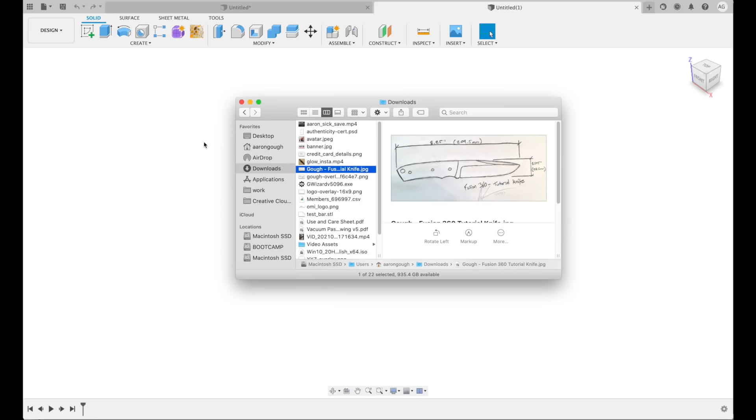Underneath the video, there's a link to this drawing. So just download this, have a quick look at it, and make note of the length and the height. So now in Fusion 360, with a blank drawing, the very first thing we're going to do is to create a new component. So if you come up here and go create new component, and then we're just going to call that blade. Within our blade component, the first thing we're going to do is insert the drawing that we're going to use as our guide and make sure that's the right size.

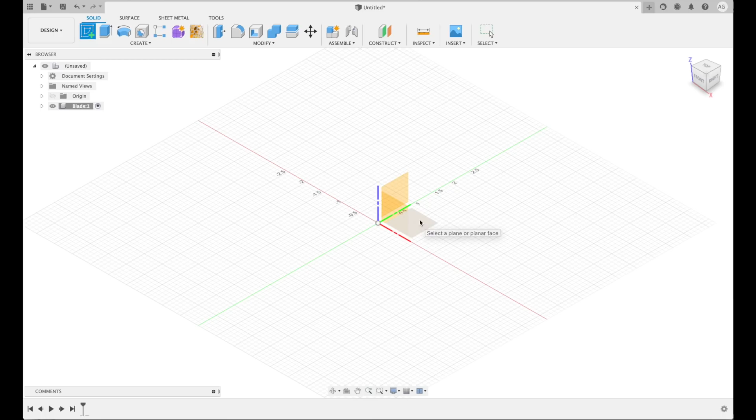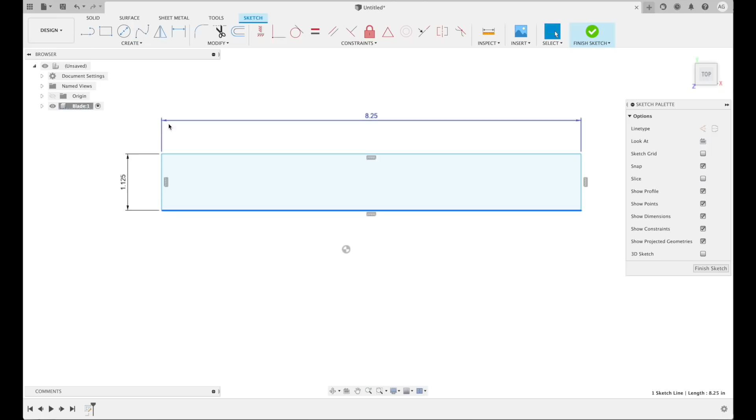First, we're going to go create, sketch, and we're going to create a sketch on the XY origin plane, which is this one that's lying down flat. And then we're going to draw a rectangle that's going to serve as a guide for placing the drawing. So go create, rectangle, 2-point rectangle, and then click and drag. And if you don't click again and you hit tab, you'll notice that these dimension input boxes are changing. So I'm just going to put 8.25 inches for length and then 1.125 inches for the height. And we're going to use this as a guide for placing our canvas.

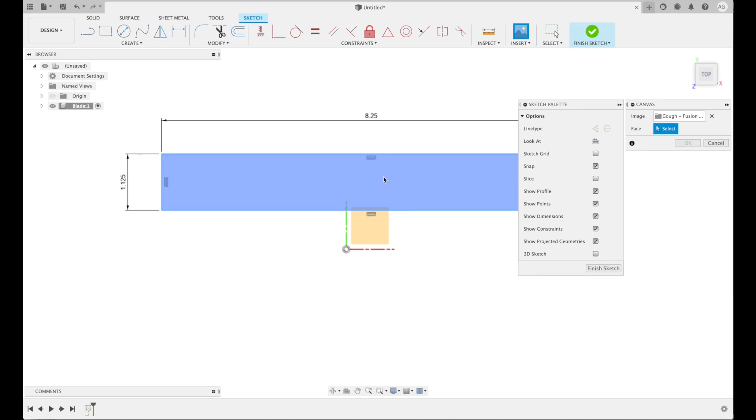So up here in insert, go insert canvas, and this will let us place the drawing of our knife. So click insert from my computer, go to your downloads folder and find the drawing and then click open. Now it's going to ask you on which face you would like to place this canvas. And we could choose the center of this rectangle, but we actually are just going to have this as a temporary guide. We're going to delete it in a little bit, so we don't want to place it on this face. Instead, we want to place it on the XY origin plane. Click there, and then you'll see this tiny little drawing.

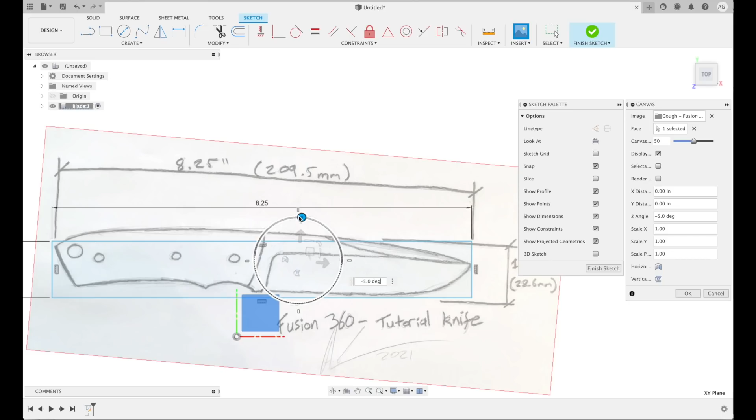So we need to resize this, and then we can drag the square handle around to put it in the right place. So the size is pretty much correct. You can see it's actually on a bit of an angle. So you can grab this top rotation handle and turn it. Now the problem is that it's in between those two snap points. So just come into this box and change the 5 to a 3. And then the knife is pretty much perfect. So once we've got the drawing of the knife correctly positioned and sized, we're just going to come over here to the canvas toolbox and click OK. We no longer need this rectangular guide, and it's actually going to get in our way. So just click and drag to select it all and then hit delete.

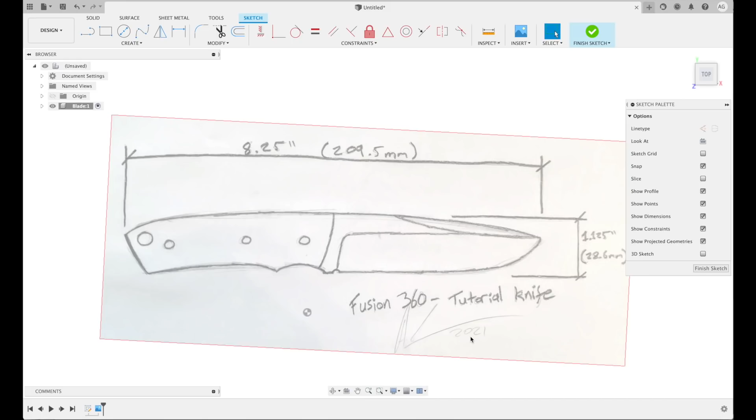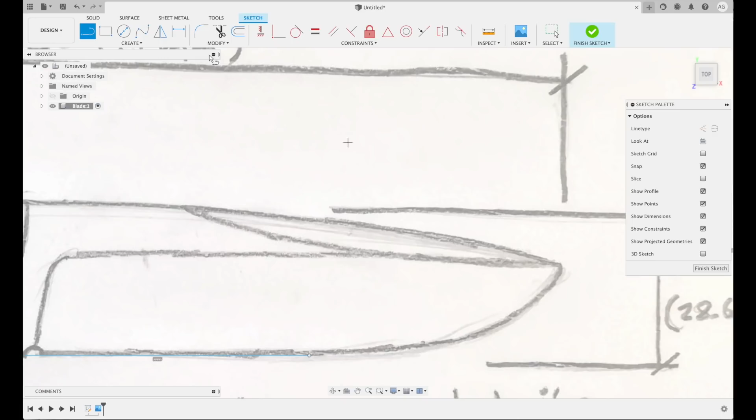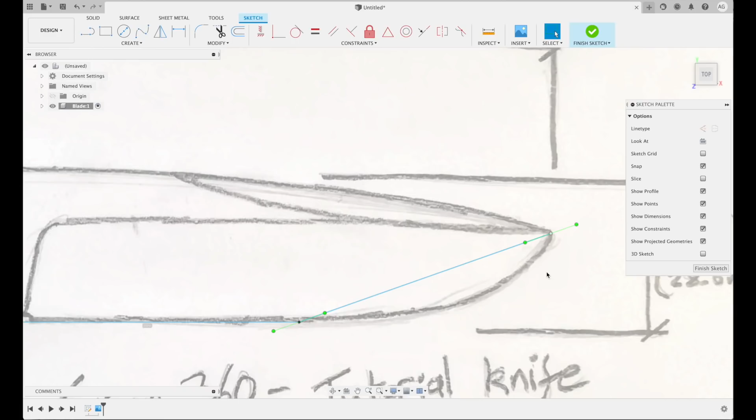Okay, so to get started, we're just going to put in a straight line along this section of the edge. So if you go create line and then create the longest straight line that we can here, about here looks correct. And then we're going to continue this line with a spline. So you go create spline, fit point spline, choose the end of our straight line, and then place the other end of the spline right up at the tip of the knife. We can't manipulate the handles of this while we're still in the spline tool, so you have to just hit escape to get back to your regular mouse cursor, and then start dragging these handles around to get the right shape for the blade.

So for the spine of the knife, it looks like we might actually be able to get away with a single spline. Create, spline, fit point spline, and we'll choose the tip of the knife, and then click all the way back here at the butt of the knife. And we'll manipulate the handles to try and get the exact shape that we want.

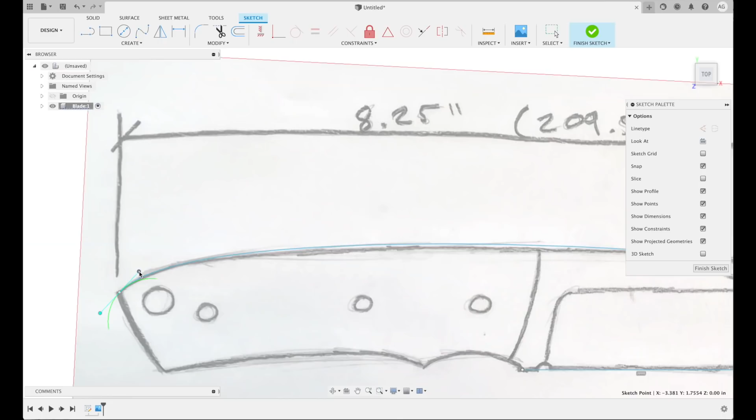There you go, perfect. Done this whole spine of the knife with a single spline. Some sections of the knife, like the butt here, don't necessarily need to be a spline because this looks like it's just a simple radius. So instead we can create an arc. So if you go create arc, 3-point arc, then you can create the two ends of your arc. So one at the butt of the knife and one at the bottom of the handle here. And then you can just create a simple radius by dragging. That looks about right. You can just click to place that arc.

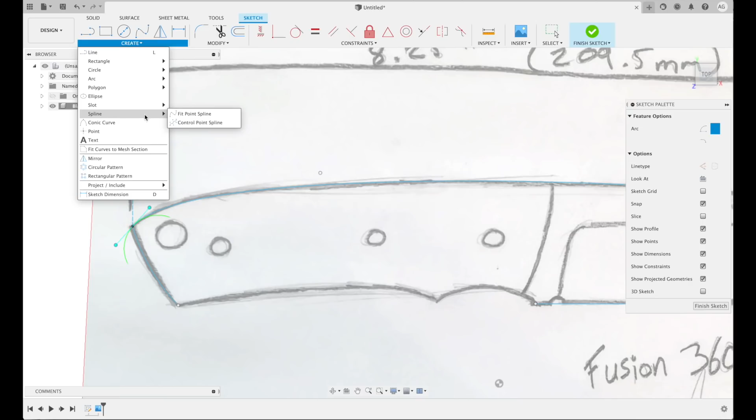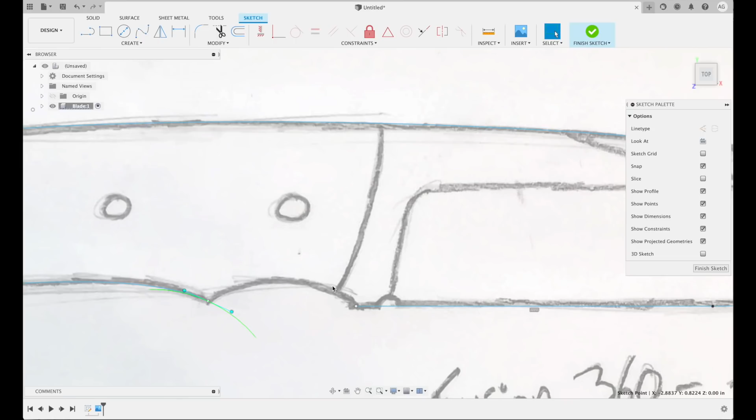Do another spline for the handle shapes. And then this looks like it could be another arc as well. So I'll go create arc, 3-point arc, put in the two ends here, and then make our arc.

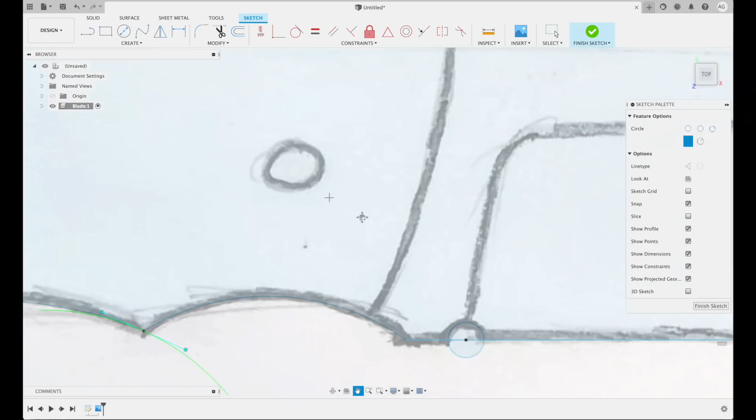So now that we've got the outline of the knife completed, we need to go through and add a couple of details. So let's do the coil first. So if you go create, circle, center diameter circle, then you're just going to choose the center point of the circle and then drag it out to be the size of the coil that you want. Then up here, we're going to create another circle for our pinhole, except this one's actually going to be dimensioned. So type 0.125 and then hit enter.

We want to create another circle here that's perfectly in line with the other one. So to do that, we're going to go create, circle, center diameter circle, and then hover over the center point of this circle, and it will actually allow you to snap to that center point. So again, type 0.125 inches and hit enter.

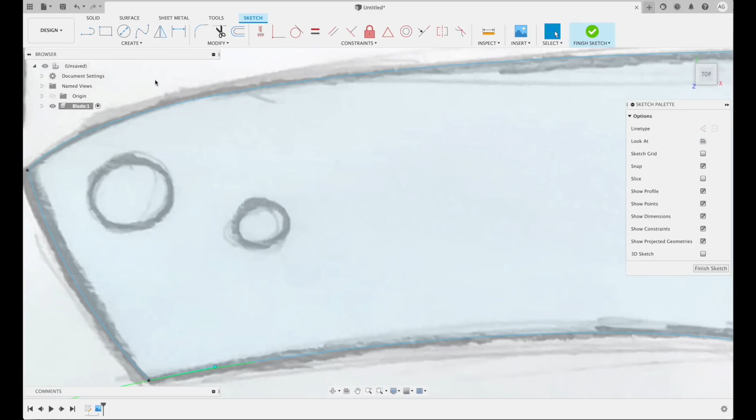This third one isn't in the same plane as the other two pins, so we're not going to snap to the other pins. Instead, we're just going to go create circle, center diameter circle, and put it in where we think it should be. 0.125, hit enter, and then we can fine tune that position a little bit. Same here, we go create circle, center diameter circle for our lanyard hole. And the lanyard hole is going to be 0.25 inches in diameter, quarter inch.

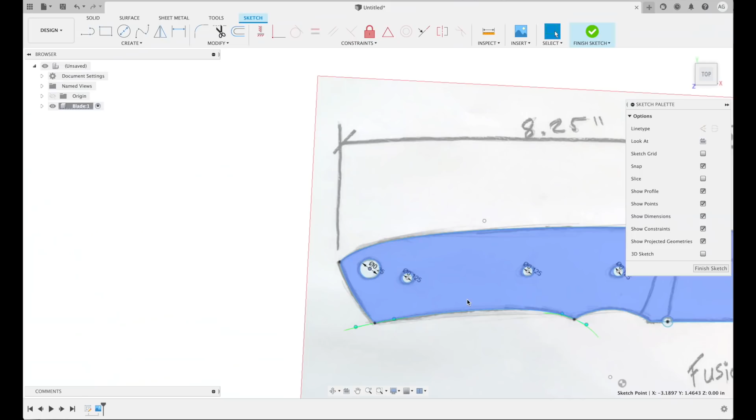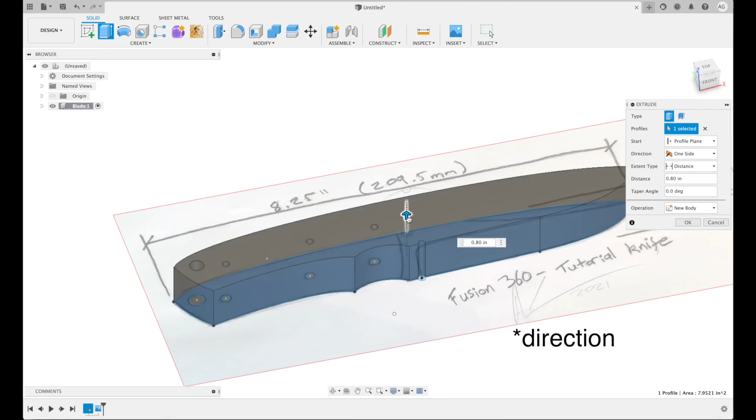So now we have all of the details of our knife put in place and ready to go. So we're just going to go over here, click finish sketch, and then now it's time to make this into a 3D knife. So to do that, we're going to come up here to create, we're going to go extrude, and we're going to choose the area around the blade and click on it, and then we could just extrude in one direction, but that means that the blade isn't going to be symmetrical around the XY origin plane. It's actually really convenient if it is, because then we can use that as our mirror plane if we want to replicate features from one side to the other.

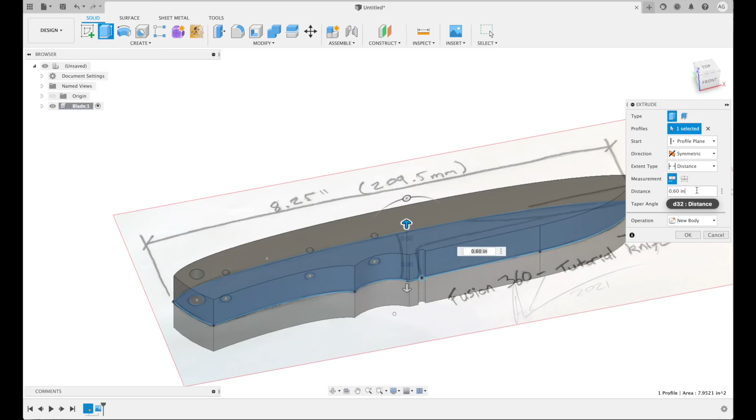So to make it symmetrical, we're just going to go over here into the extrude toolbox and change it from one side to symmetric. And then here for distance, we want the total thickness of the knife to be 0.156 inches. But because it's symmetric, it's going to make it 0.156 inches in each direction. Fusion actually allows you to do formulas in boxes like this. So we can say 0.156 divided by 2, and that will give us our correct overall dimension. Everything looks good, so we're just going to hit OK.

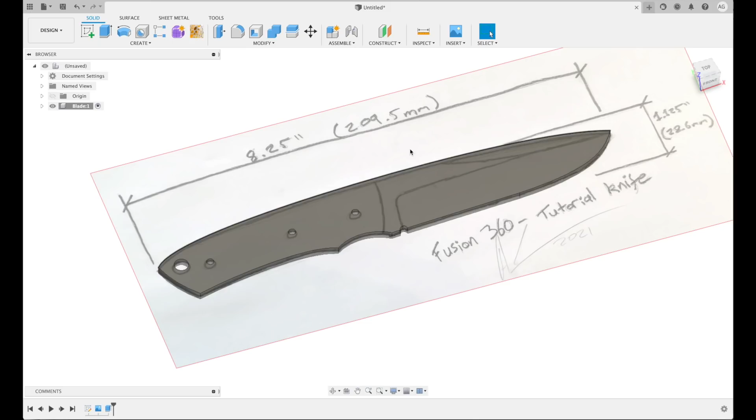Now let's get stuck into making the bevel. So the very first thing that we need to do is actually to create a plane. The plane will allow us to draw a sketch through the plunge line of the knife, and that's where we need to draw our bevel shape. So if we go up here to construct and then plane at angle, we're going to choose this line just at the front of the choil.

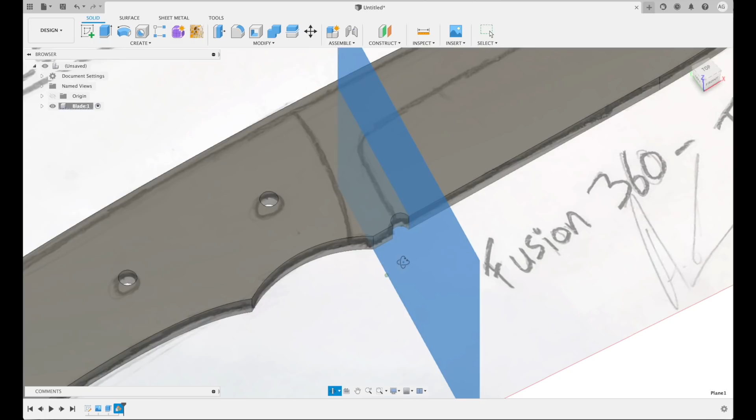And then you can see that now we have a plane that is at an angle relative to that line on the choil. So we're going to rotate this until it's lined up with the plunge line from our drawing. That looks like it's right at about 80 degrees. Then we're going to hit OK. Now on that plane, we're going to create a sketch. So go create sketch and then choose the plane as where we're going to draw the sketch.

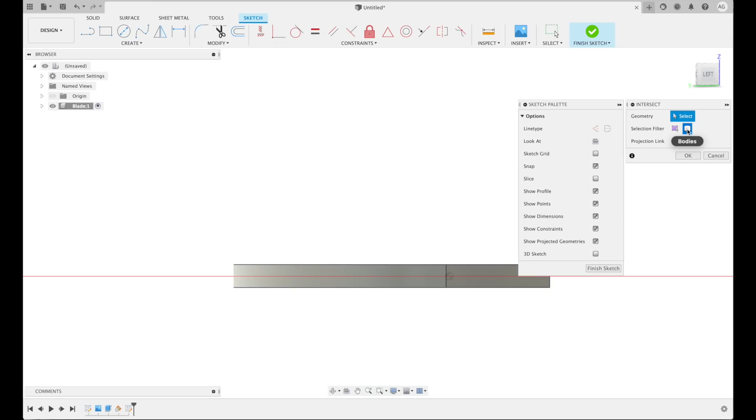Then the very first thing we need to do is actually get a reference for where our blade intersects that sketch. So we're going to go create and then go down here to project, include, and go to intersect. Make sure the selection filter up here is set to bodies, and then we'll click the blade body and then click OK. And this will give us a rectangle showing us exactly where the blade intersects our drawing.

To make life a little bit easier as we're doing this sketch, we're actually going to come over here in the view tree and go to blade 1, bodies, body 1, which is our knife blade, and then turn that off.

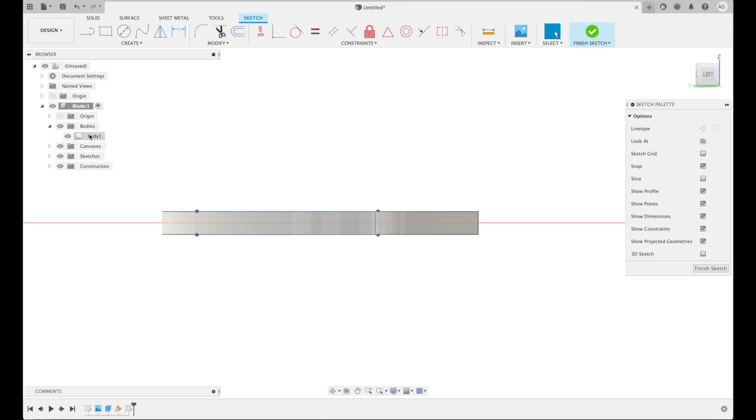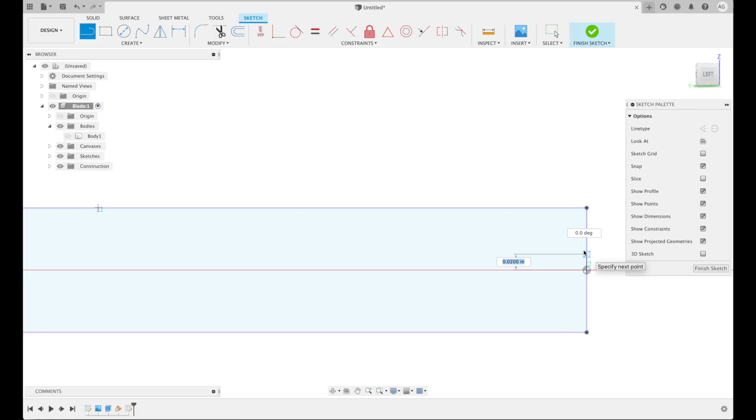And that'll allow us just to see only the sketch without having to worry about the blade body getting in the way. Now, what we need to do is draw a tool for cutting away a section of the blade to make our bevel. So for this, we're going to create a couple of lines. So if you go create line, draw a line upward from the center. This line upward is going to be half of our desired edge thickness. Type 0.01 and then hit enter.

Now I'm going to draw a line from here back to the place where we want our bevel to end. I'm just going to choose somewhere around there. You could set that by angle or distance. This section, this triangle here, is actually going to be the part of the blade that we're going to be cutting away. To make this work really nicely, we actually want to extend our cutting tool a little bit.

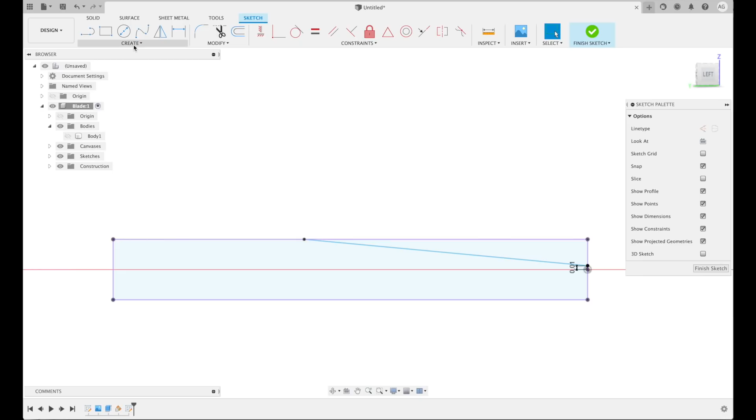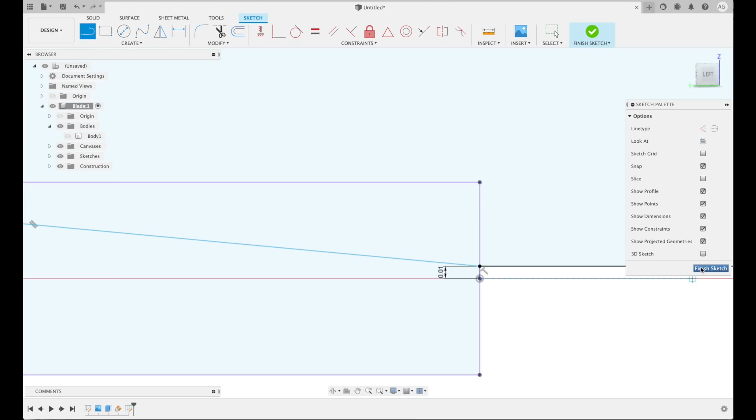So what we're going to do is go create line. We're going to choose the end of the bevel up here, and then move the line around until you see this blue double line icon. That means parallel. So we're creating a line that's parallel with that part of the triangle. So just going to click here, and then create a longer box tool around that triangle. So this is perfect. Click finish sketch. And now we need to come back up here to the view tree and turn the body back on.

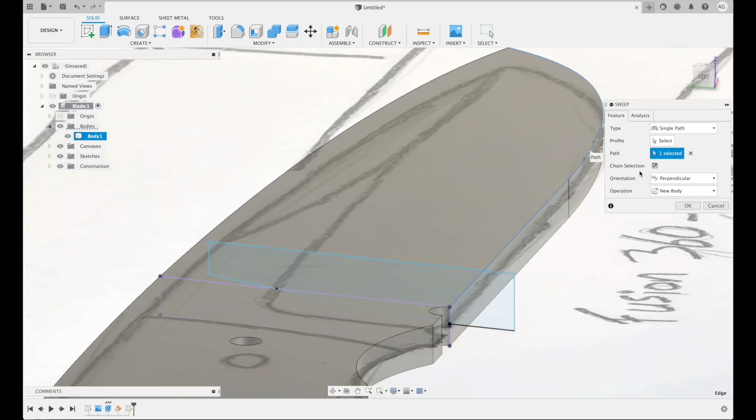Now to actually create our bevel, we're going to use a tool called sweep. So if you come up here to create, sweep, and then we're going to first choose the path. So click on path here, and then choose the edge of the blade. And then come over here to profile, and we're going to choose the extra part of this tool that we made, and then also this triangular inside part. And you can see that what it's actually doing is taking that shape that we made in this sketch and then dragging it along the knife blade and cutting away material as it goes. Click OK in the sweep toolbar, and then we can have a look at our knife blade.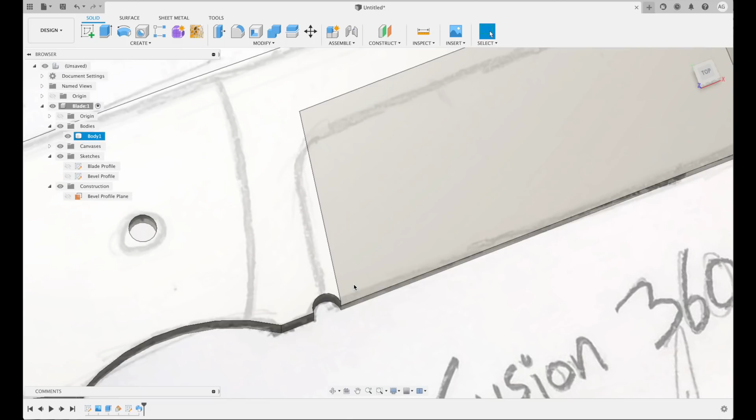So now that we've got our blade bevel done, the next thing we need to do is create our plunge line. Because right now, the start of our plunge line is this kind of impossible square corner. So we need to make a nice rounded transition in here. To do that, the first thing we're going to do is create another sketch. So we'll go create, sketch, and then create it on this flat surface of the edge. From here, we need to get a reference point up here at the top of the plunge line. So we're going to go create, project, and then choose this little corner and go OK.

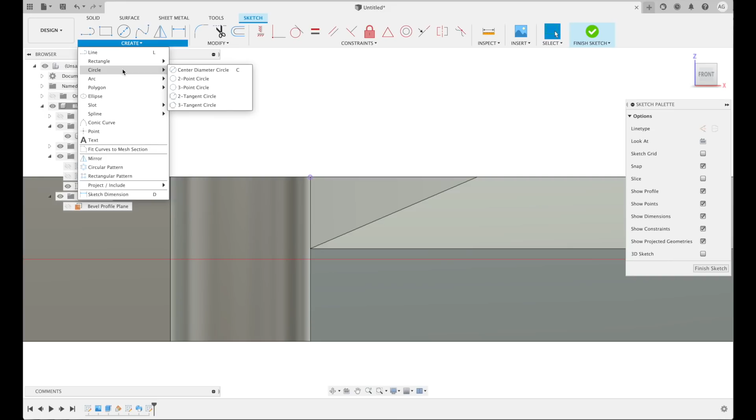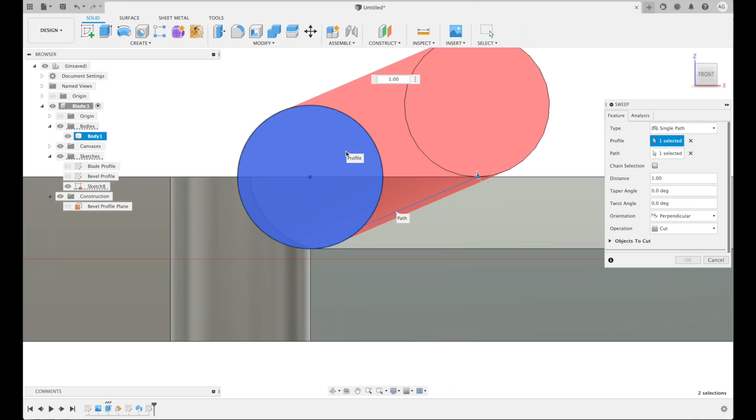Then all we need to do is create a circle. So if we go create, center diameter circle, choose the top of this, and then extend the circle down to the edge, that's it, we're done. So we're going to go finish sketch. Then from here, we're just going to create another sweep. So we go create, sweep. For our path, we'll just choose this line, which is actually the inside corner of our plunge line. And then for the profile, we'll just choose the circle. We're going to keep the operation as cut, and then hit OK. And you'll see that creates a really simple rounded plunge line.

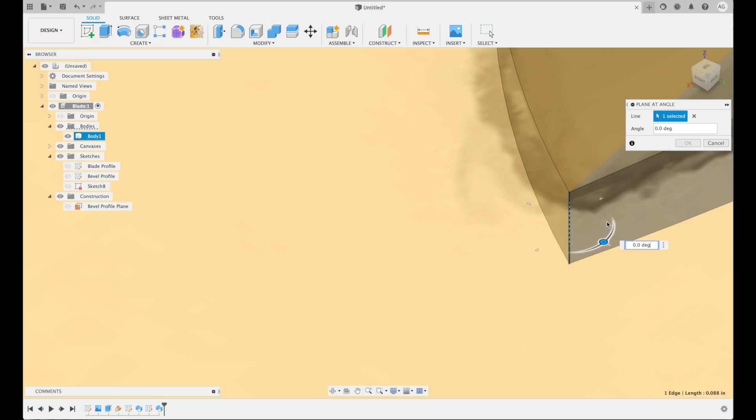And then just the last thing we're going to do is cut a swedge on the top of this. So to get started, we're going to create another plane. So we're going to go construct, plane at angle, and then we're going to choose the tip of the knife right here. So we'll choose that edge. And then you want to rotate the plane so that it's lined up and pointing at the end of the swedge up here.

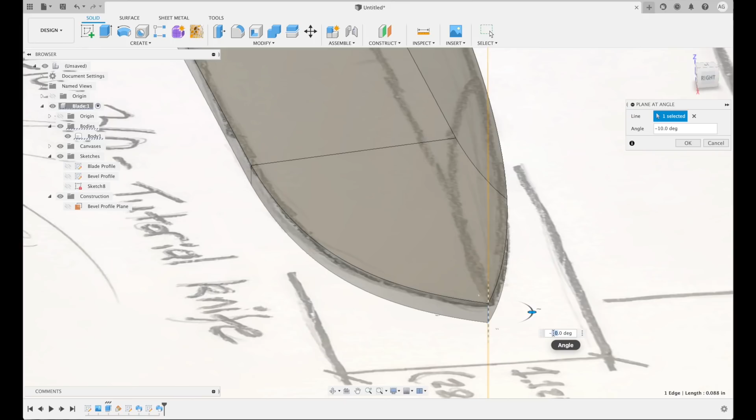So we're just going to rotate this around by turning the rotation handle, and then we'll look right down the barrel of it like this, and you can see it's not quite lined up. It needs to be a little bit to the left. So this probably needs to be -10 degrees. So if we have a look at that, that looks pretty good. It's nicely lined up. So we'll just hit OK.

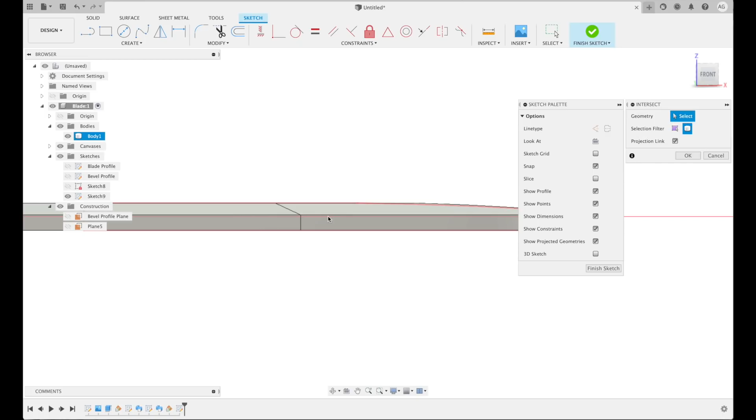Then on that plane, we're going to create another sketch. So go create, sketch, click on this plane. And then we need to find out where this blade body intersects that plane. So again, we're going to create an intersection. We'll go create, project, include, and then intersect. Make sure that the selection filter is set to bodies, and then click this body and click OK. And now if we turn off the body just to get rid of the visual clutter, you can see we have this shape here that shows our intersection with the blade.

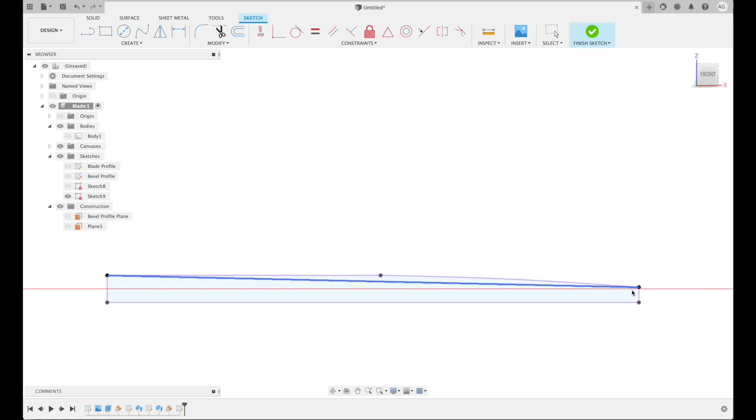And all we're going to do is draw a line. So if we go create line from the very tip of the knife to the back of that intersection, and then we'll go finish sketch. That straight line is actually going to be used to create yet another plane.

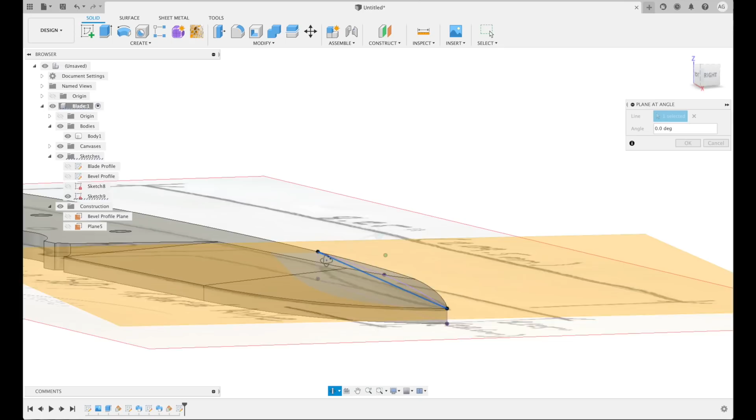Sometimes things can seem a little long-winded, but once you get used to thinking in a certain way, it all comes together pretty quickly. So we're going to go construct plane at angle. We're going to choose this long straight line, and then turn back on that body so we can see what we're doing. We're going to rotate this until this shaded section where it's intersecting looks quite a lot like the swedge that we want. Right now it's set to 15 degrees, so let's hit OK.

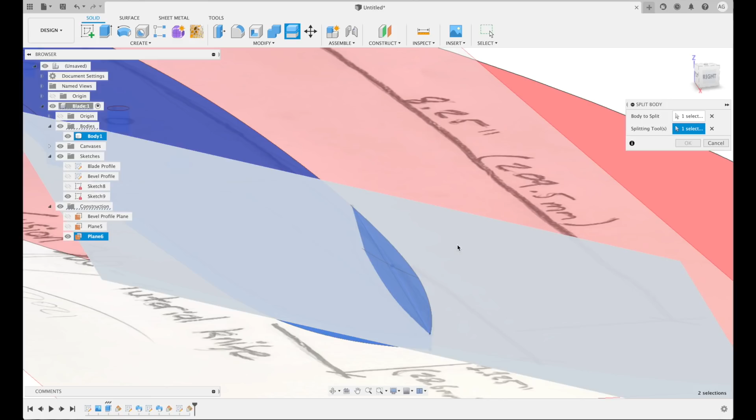And then we're actually going to use that plane as a cutting tool. So if we go up here to modify, and then down here to split body, we'll say the body to split is the knife blade, the splitting tool is this plane, and then hit OK. Then you can just turn off that second body. In the view tree here, we're going to turn off body 2, which is the offcut. Down the bottom in construction, we'll turn off plane 6, and we can also turn off the sketch, just so we have a nice look at it.

Look at that. We have a nice swedge built in as part of our knife blade now. We don't need this offcut body anymore that's part of the swedge, so we can right click on that and say remove. You'll see that'll actually get reflected down in the history bar here.

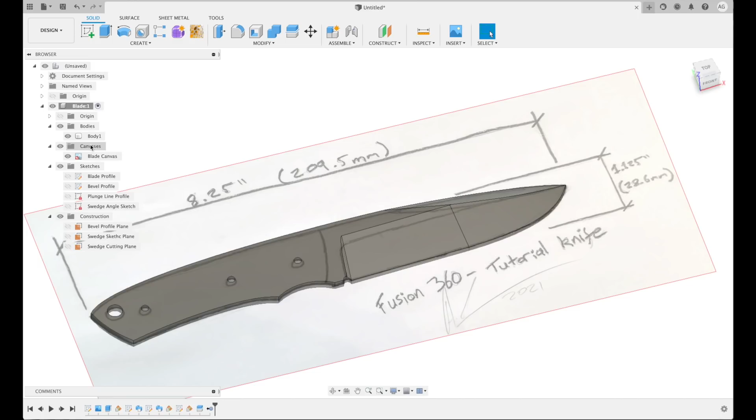So now to give us a really nice clear view, we can come over to the object tree here, go into canvases, and then turn off the blade canvas, and we can see exactly what we've ended up with. But obviously all of that work has just been done on one side. The other side looks totally bare. Now, the naive way to do that would be to go on the other side and replicate all of the work we've just done. But we don't need to do that.

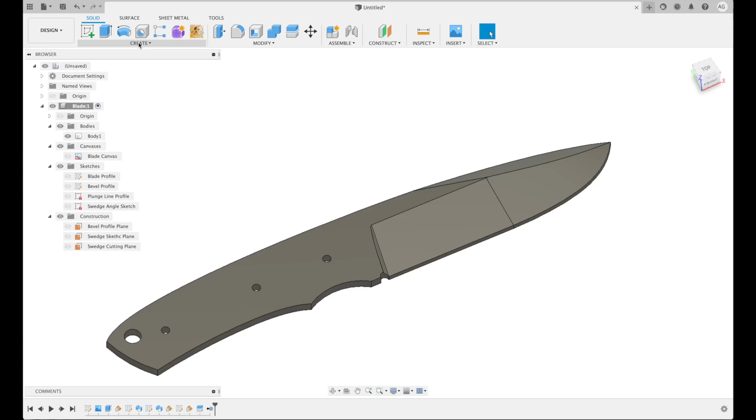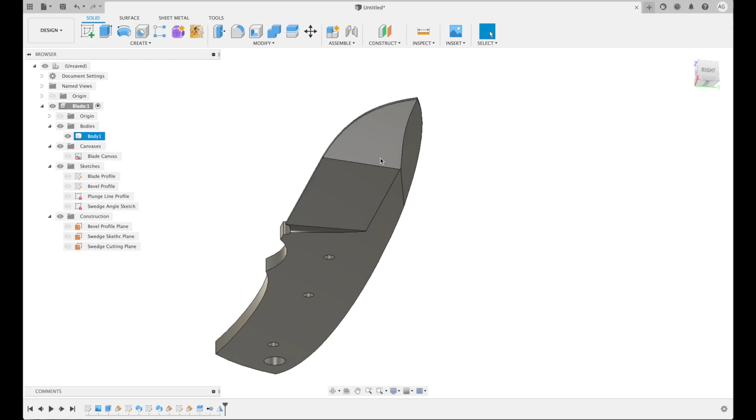All we need to do is create a mirror. So if we go up here to create mirror, the type of the mirror is going to be faces. We're just going to select all of these faces that we created during the making of our blade bevel. And then the mirror plane is going to be our XY origin plane, this one that's flat relative to the knife. Then we can have a look on the other side, and we can see that all of those faces of our blade bevel are now replicated left to right.

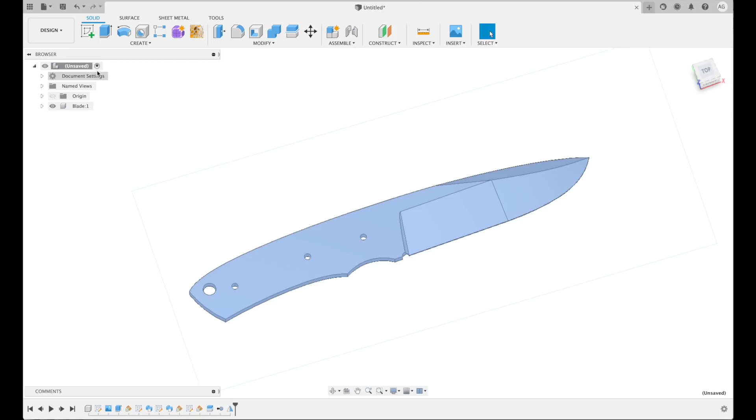So now that we've got our blade completed, let's rip through adding in some handle scales. For that, we're going to want to add a new component. Come up here to the main object in the object tree and click this. That's going to activate the root component, which is kind of like the placeholder for everything in the drawing. Then from there, we're going to say new component, and we're going to call this handle scale right. You can see that adds it just underneath the blade, which is exactly what we want.

So now inside this component, we're going to create a sketch. If you come up here to create sketch, and we're going to create it on the side of the tang of the knife. So we already have all the geometry, like the pinhole, lanyard hole, everything included in this sketch because we created it on this plane. But the only thing we need to add is a line for the front of the handle scale.

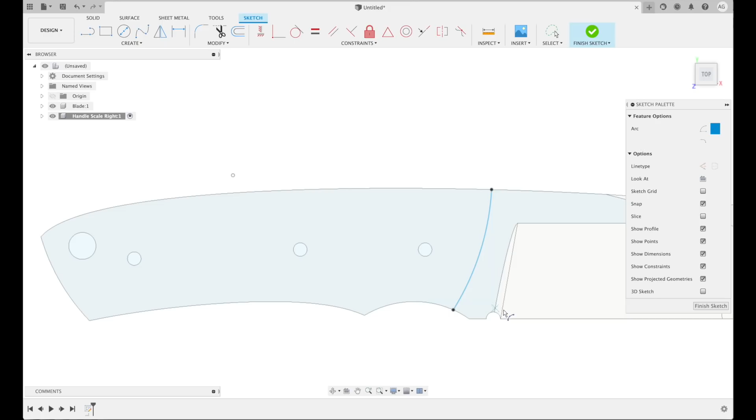So we're going to go create arc, 3-point arc, and then we're going to put a point down here at the bottom of the handle, and then a point up here at the spine of the knife, and then change this arc to something that you like. So I'm just going to create it right there. And then I'm going to say finish sketch.

Now we can go up here to create extrude, choose this section of the handle scale, and then drag it up to extrude it. So we're going to say 0.375 inches in height, 3/8, and we have a very crude handle scale. First thing we're going to do is add an overall curve to the handle scale.

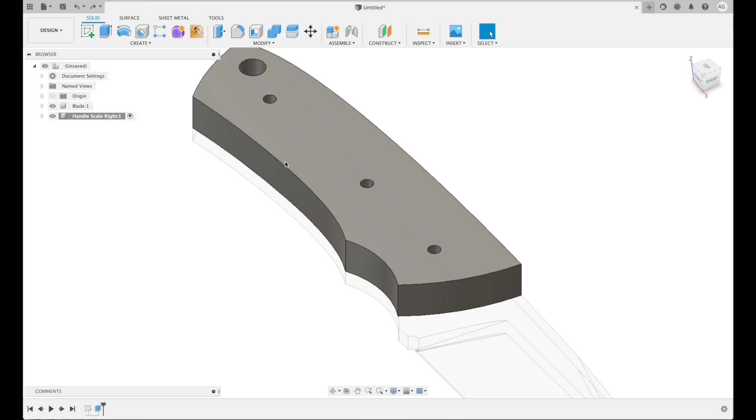So we're going to go construct, plane at angle. We're going to choose the very front corner of the handle scale right here, and then change the angle to be 90 degrees. So you can just type in 90 and hit enter. Then we're going to create a sketch on that plane. So create a sketch here.

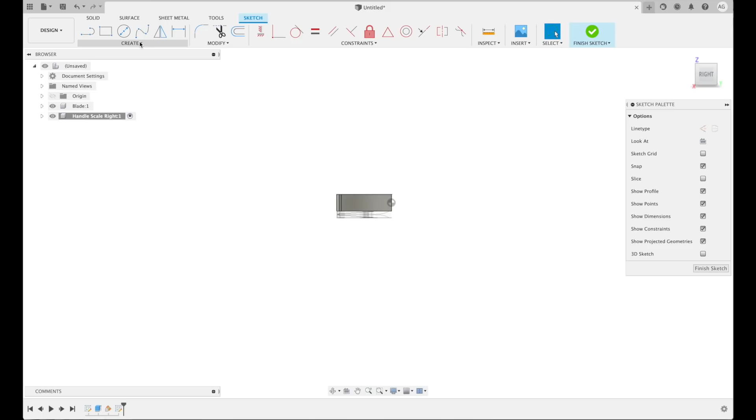What we want to do is draw a really big circle. We'll say create circle, center diameter circle, and draw a really big circle like this. It needs to go through the handle scale, so you don't want it above the handle scale like this, it has to be below. That's our nice big curve. We could make it smaller if you want.

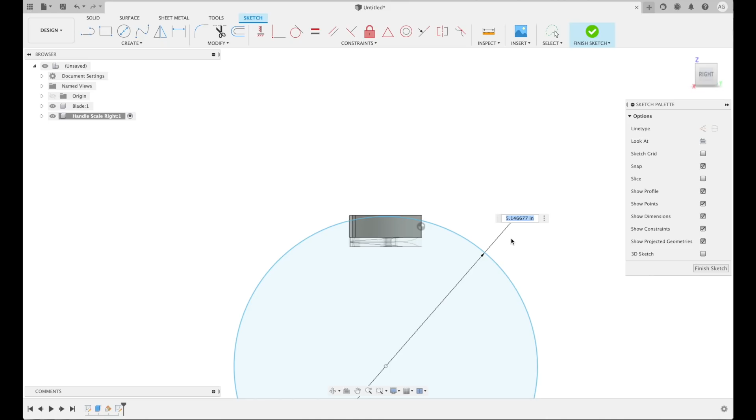We can say create sketch dimension and add a dimension here. Right now we can see the diameter is 5.14 inches. If we change that to a 3-inch diameter and hit escape to get out of the dimension tool, then move this circle up, we can put it inside the handle scale like that.

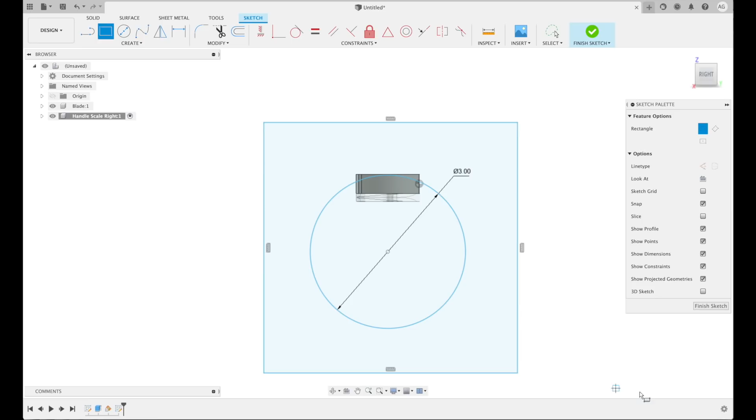Then we need to make this into a cutting tool. So we're going to go create rectangle, 2-point rectangle, and quickly draw a rough rectangle entirely enclosing both the knife and the circle we made. Then you can say finish sketch.

We're going to do yet another sweep using that circle. If we say create sweep, we are going to choose the spine of the knife for the path we want to follow, and choose this big rectangle as our cutting tool. For the operation, we're going to say cut.

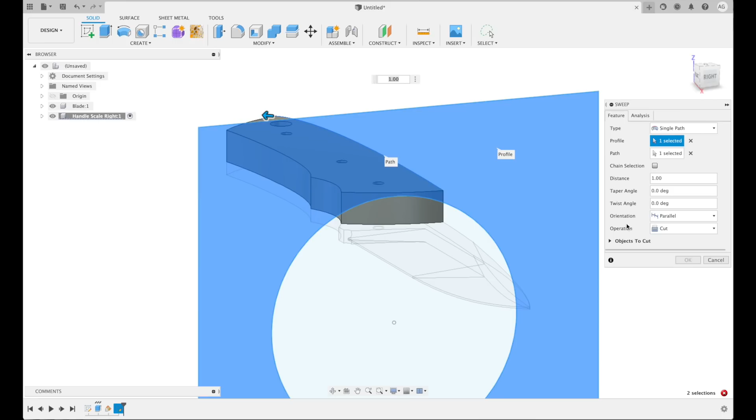Right now it's saying the body would intersect itself, throwing an error. All you need to do is change the orientation from parallel to perpendicular, or vice versa in this case - we've just made it so that it's set to parallel. Now you can see that it's sweeping that cutting tool along the handle and adding a nice rounded over shape to it.

Just to demonstrate a concept - I just realized I would have really liked to add a chamfer to the front of this, but if we do it now, that chamfer is going to follow that curved line, ending up with this really weird shape on the front. We don't want that. So if you forget to do something in the right order, what you can actually do is come down to the history bar and drag the history marker backward. Now I've gone back in time one step, before I executed that sweep.

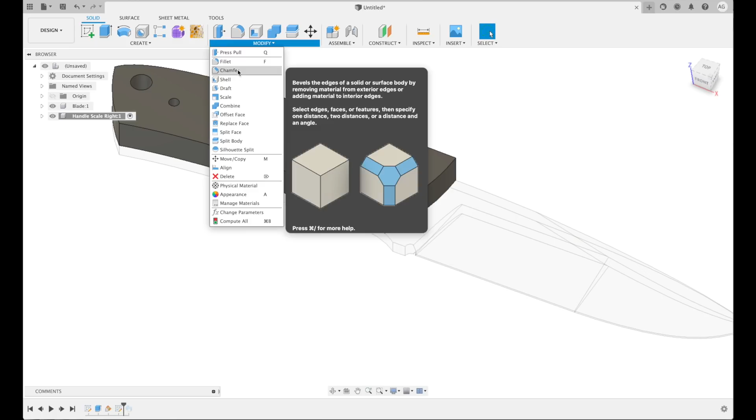Then I can come up to modify, chamfer, and add in the chamfer I want on the front of this handle scale. Let's just add something like that and hit OK. Then we can come down to the history bar and drag the history marker all the way to the right, and you see now we've got both our chamfer and our rounded handle scale.

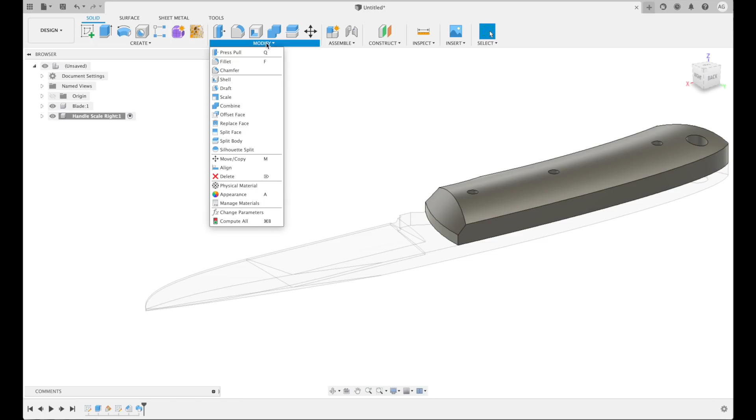Now we want the edges of the handle scale to be rounded over. So we'll come up to modify, fillet, and choose the spine of the knife here. You can either click and drag, or put in numbers up here. This is a bit of my personal style - I like the fillet on the spine to match up with the chamfer on the front. So we're going to tweak that until it matches, which is right there.

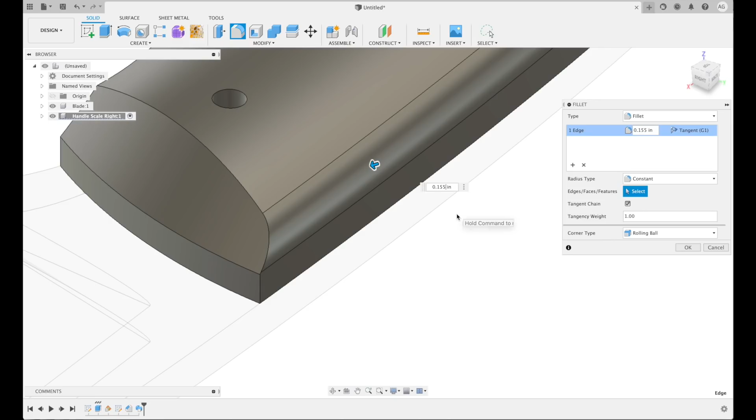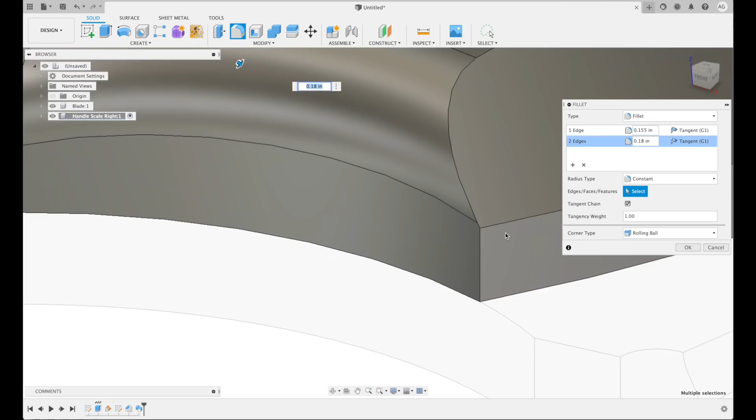Over here in the fillet toolbox, you're going to hit the plus button, which lets you add another set of fillets with their own parameters. So we'll choose the underside of the handle scale here, drag that down, probably around 0.16 or so - no, we can go bigger, 0.18, just so it matches up with the bottom of this chamfer. That looks perfect. We'll hit OK in the fillet toolbox, and we have our handle scale.

Again, to get that on the other side, rather than duplicating all that work, we're just going to create a mirror. Come back to the object tree and activate your root component, then say create mirror - over here it's going to say objects, we're going to choose that handle scale. The mirror plane is again our XY origin plane, so just this one that looks flat. We'll say OK. So here we have our finished knife.

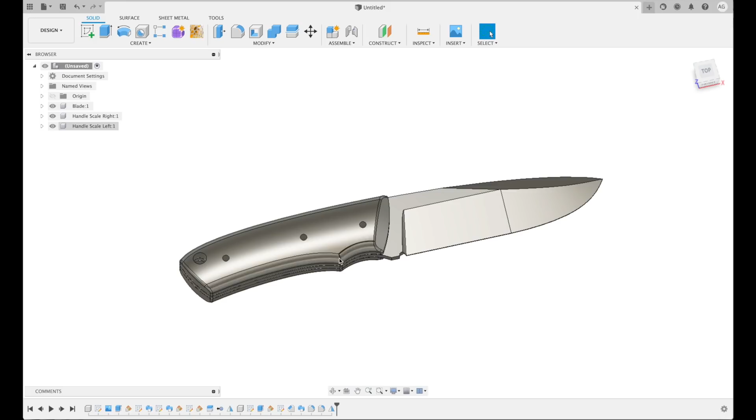We have our blade with the bevels and the swedge. We have a pair of handle scales. And everything is nicely organized so that you can find things as you need to.